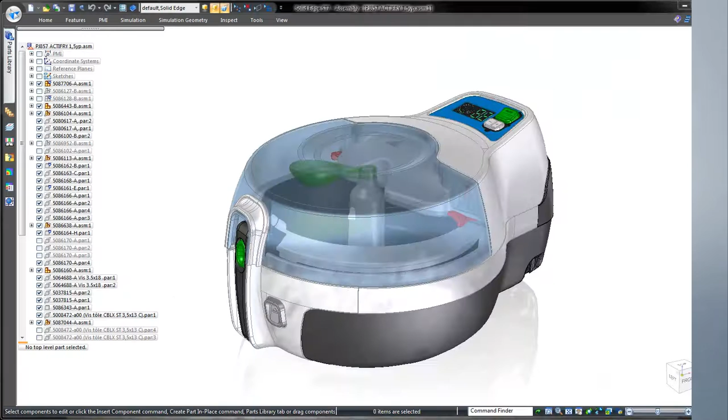Solid Edge delivers intuitive tools for complex shape construction, a must for designers of ergonomic and aesthetically pleasing consumer products. Here we have a kitchen appliance from one of our customers, Tefal.

To demonstrate Solid Edge's capabilities, we'll redesign the rear panel of this domestic fryer to eliminate physical interference between its cooling fan and the rear casing.

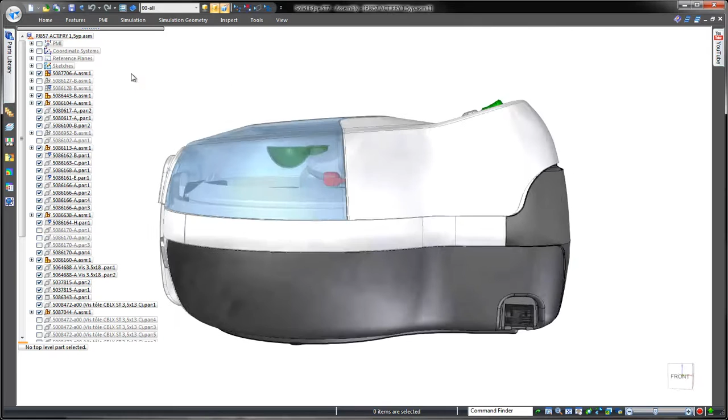An industrial designer has modified the rear panel in conceptual sketches, so we'll display these in Solid Edge. This new design accommodates the repositioned fan while also providing a handhold to easily lift the fryer. We'll use this collection of sketches as a template to guide curve creation, ensuring we closely match the designer's vision for this part.

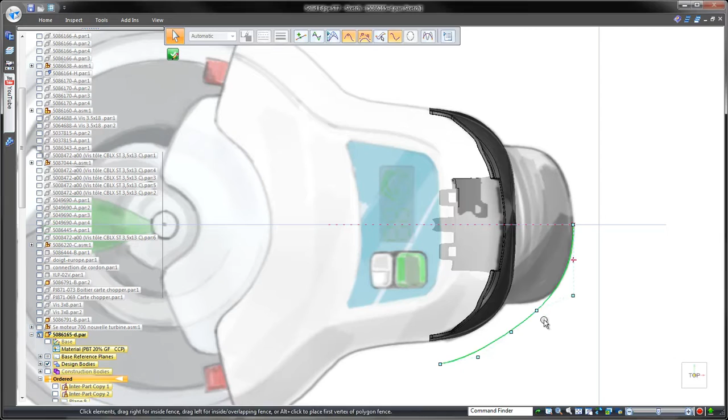Solid Edge allows us to generate a free-flowing yet customizable curve with a minimum of control points, yet drag any point and completely change the shape. In this case, we'll design one half of the new feature and then mirror to complete the design, so we'll connect the endpoint of the curve to the part's midline.

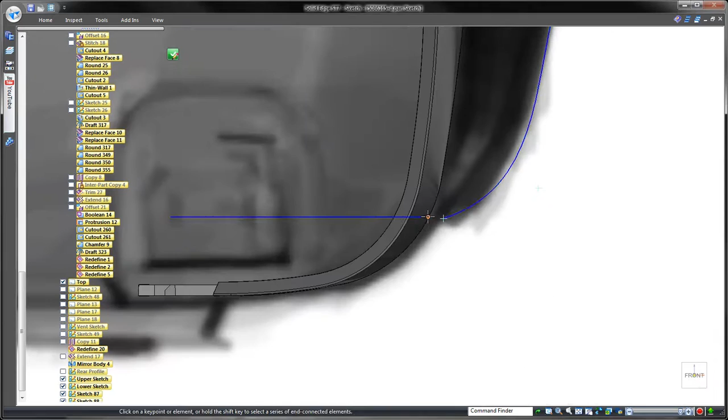Here we'll use two pre-existing sketches placed relative to the top and bottom in the industrial design sketch. Once again, we'll draw a curve to match the side profile of our template and connect the endpoints to these upper and lower sketches to define the exact start and end points for the final feature. We drag control points to replicate the conceptual shape.

The cross and guide curves must be connected to create a successful surface feature, and Solid Edge Blue Dot does the job.

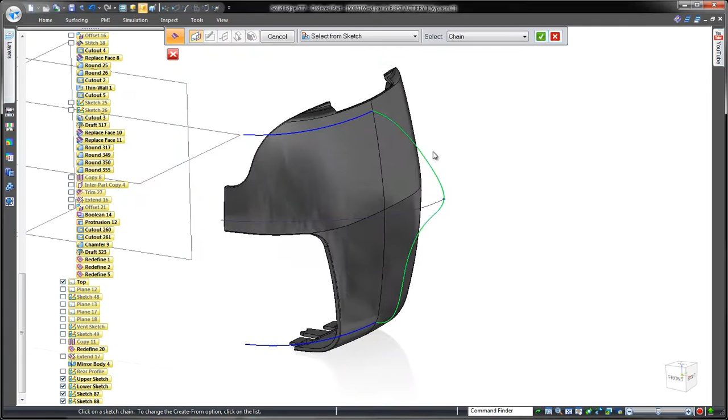We'll extrude this curve to create a construction surface for controlling tangency across the midline of a symmetric part. BlueSurf within Solid Edge enables us to loft a surface between the three curves while guiding its shape with the edge of the construction surface. Individual tangency controls ensure that the BlueSurf is tangent continuous with the construction surface and thus the mirrored face.

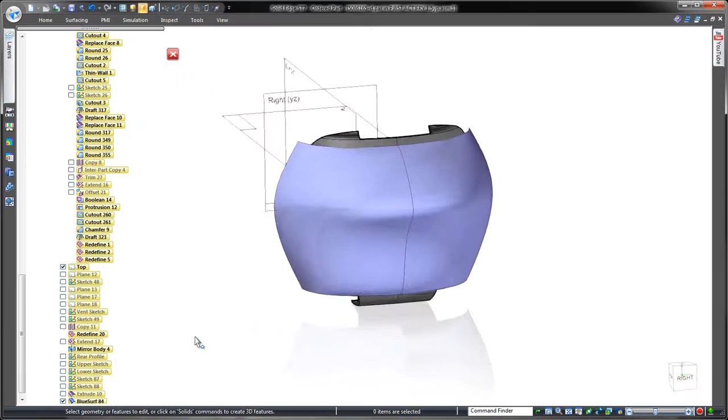Our next task is to trim away part of the surface we don't need. We'll project onto our surface an existing curve based on the conceptual sketch. Simple and fast.

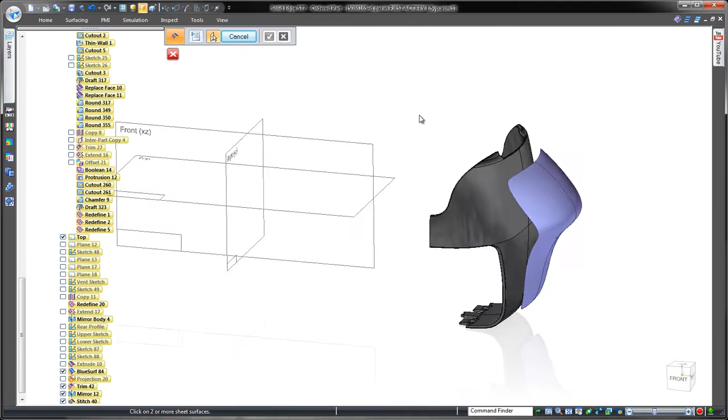To complete this rear surface, we'll stitch together the two halves. The ruled surface command extends the edges through the existing casing part.

Advanced rounding really aids aesthetics, so we'll place a constant width round along the edges. Next, we'll use surface body by boundary to cap off the inside of the surface body.

Stitching these two faces will form a solid body that we can use to punch or emboss the original part. Simple and fast.

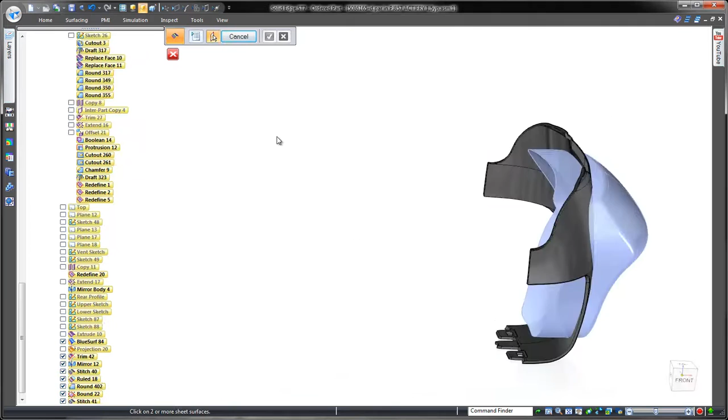We can finish the design by rounding the resulting edges.

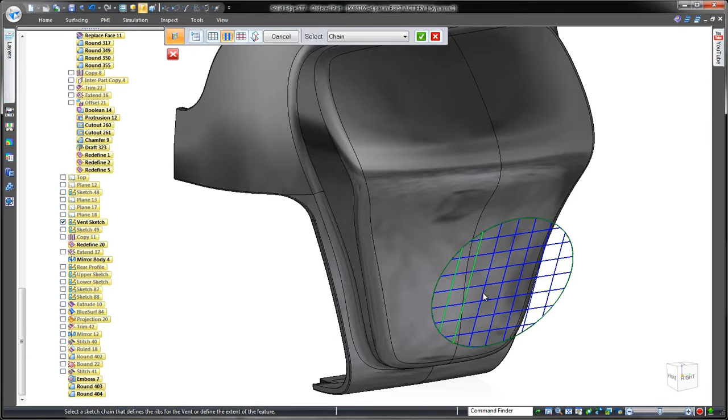Since our design goal is to make space for an exhaust fan, we need to build in a vent. The Vent tool constructs a customizable series of ribs and spars in an array using any basic sketch. Imagine creating this complicated feature with traditional cutouts and extrusions.

Creating complex shapes in Solid Edge is easy, yet smoothness and flow of the final plastic is of utmost importance. In this part, we have 6 individual faces along the top. The Zebra Stripe visual inspection tool helps.

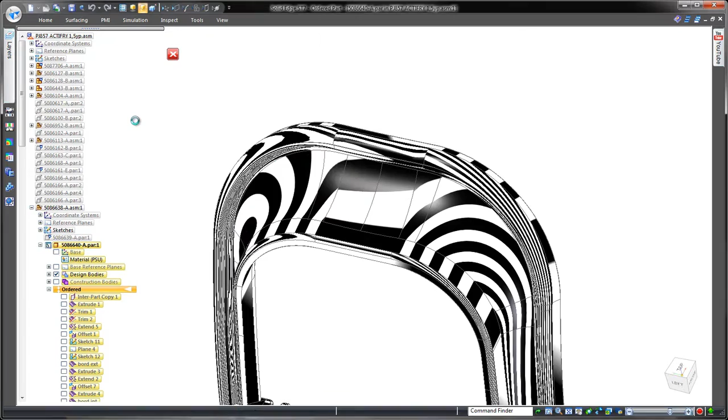Note that the zebra stripes reflect jagged transitions across the patches, so we'll use the Redefine tool to merge the 6 patches into one beautiful and continuous surface.

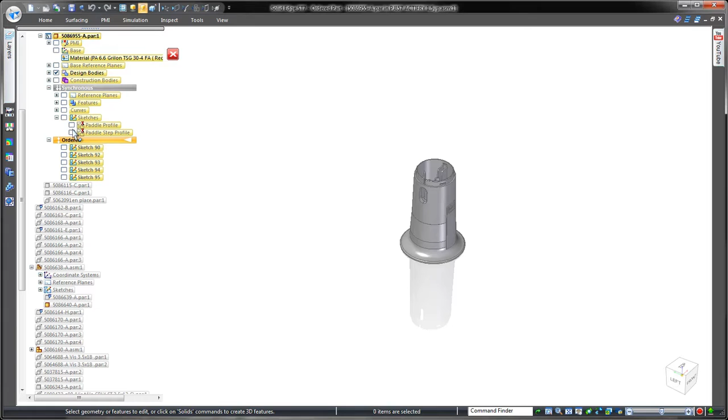Now that we've seen some powerful surfacing tools in Solid Edge, watch as we create complex geometry utilizing multiple solid bodies. This fryer uses a stirring paddle to ensure an even distribution of cooking oil throughout the food, so we need to design an arm coming off the paddle's mounting hub.

To begin, we have a top view sketch of the arm's shape and a side profile sketch depicting how the top of the arm curves away from the center mount. We'll combine these sketches to generate a resulting cross curve of their virtual intersections.

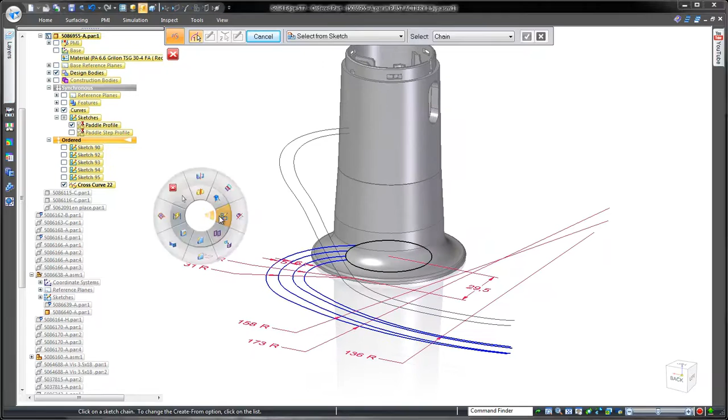As we create a series of profiles through which we can create a lofted feature, we'll use the pre-existing curves to guide the feature's transition through the cross sections.

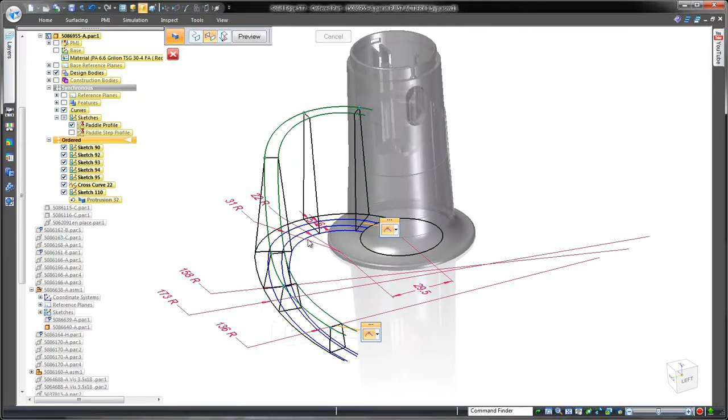At any point, we can make a change to the defining cross-section profiles. Watch how the complex lofted feature dynamically updates. In this case, we want to retain the original design.

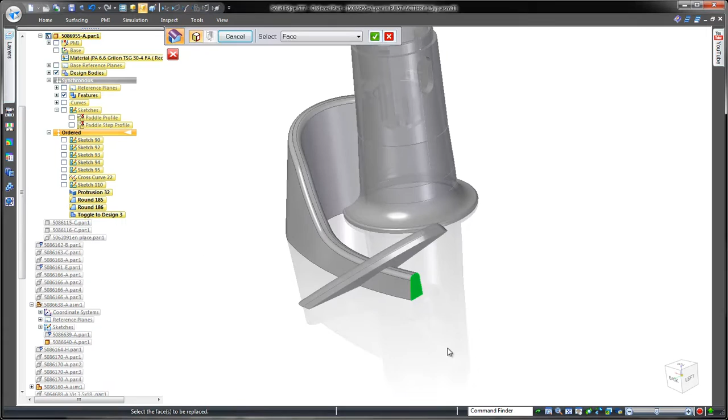To finish this arm, we'll place a constant width round on the top edges. The end of the paddle is a proven design that we're simply going to integrate into our paddle arm. Watch as we use the Replace Face command to trim away the end of the arm body.

Our final goal is to hollow out the paddle's face. A Replace Face option allows us to add a cross-section sketch which we can pull inward.

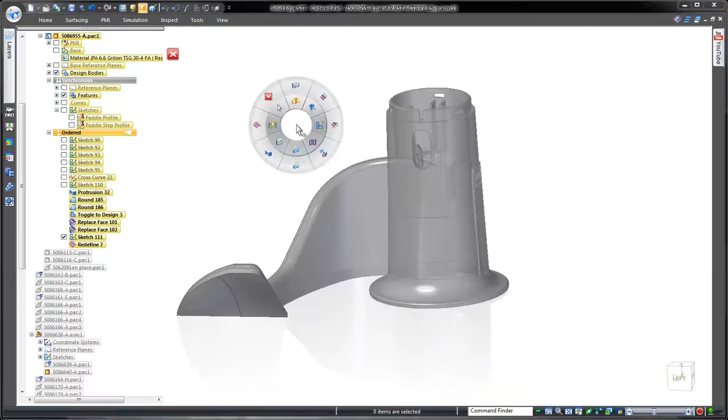That was easy. In this demonstration, we've proven that Solid Edge provides a broad collection of surface and solid modeling tools, perfect for creation of complex consumer products. Solid Edge. Design better.